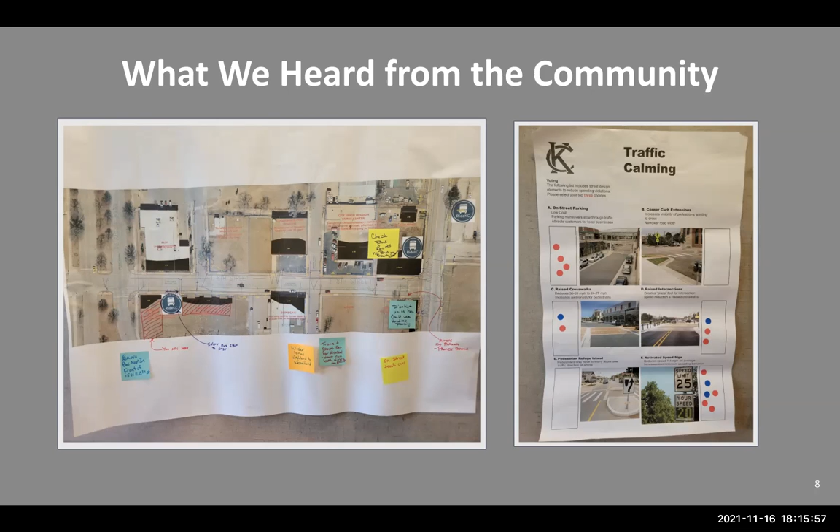So this is the start of our plans. The project starts on 8th Street at the Paseo. We're adding curb to delineate on-street parking, and also using it to narrow up the crossings and crosswalk areas. So we're adding crosswalks and ADA ramps to make the area more walkable, as well as helping to calm the traffic that goes down 8th Street.

We're adding some green space and some trees, and we're still accommodating the bus stop currently on 8th Street. We've moved it a little further east to allow for parking right in front of Quinlan Place. Then at Flora, we've improved the crosswalks and accessible ramps to help folks get across 8th Street going to the Aldi's or up the street, where there are some restaurants along Independence Avenue.

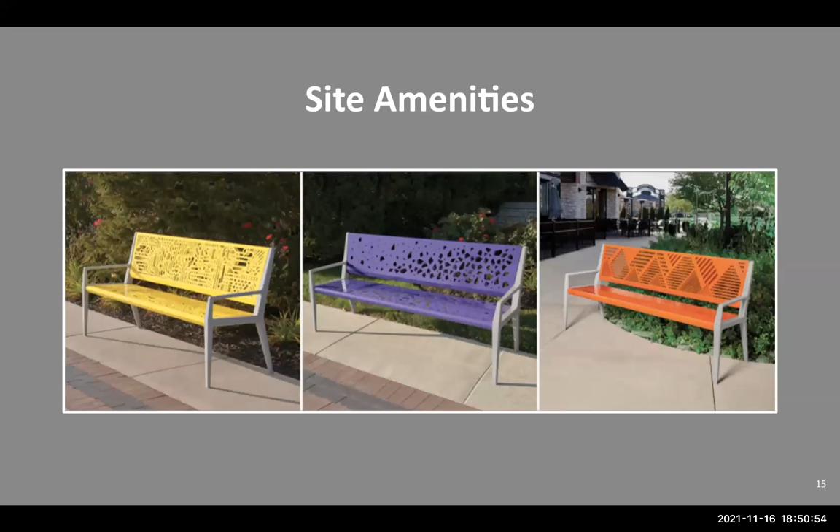It's fairly small scale, the plan anyway, but we don't have the specific locations identified. We just know that we want to integrate the seating into the streetscape, so the exact quantity is unknown, but we want to make sure we have plenty of seating opportunities. Michelle, anything to add? I would just add, I think there definitely would be benches at the bus stops. I don't believe there currently are any now, except for maybe the one down at 8th and the Paseo. But I agree with Bruce.

In our first round of the preliminary design, we kind of identified some seating areas. And then as we continued to work on the preliminary design, we decided to hold that out. You can see in the slide that's up right now, we have identified the bench at the bus stop there on Woodland at 8th Street. But we want to work with the community to really set those benches where they would be most beneficial to those living in the community.

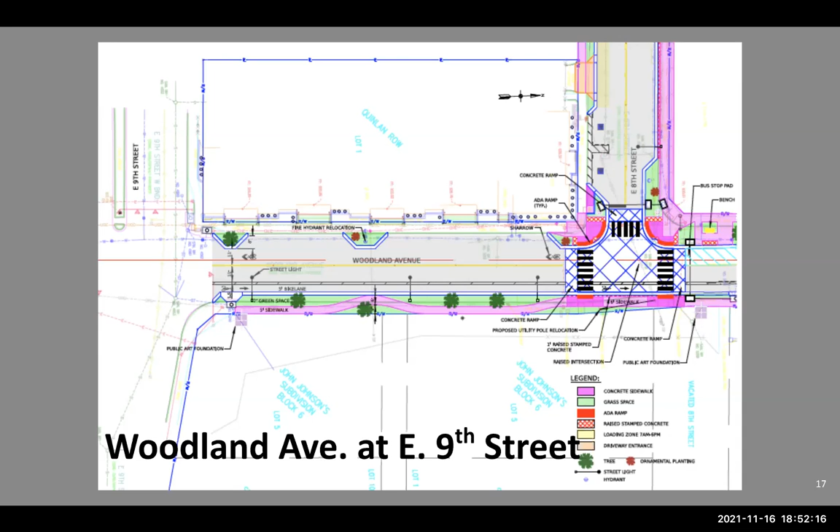So I have a comment on the benches, and then Chase, I have a question for you if you don't mind. My comment is, knowing our homeless population is in that area, how are they going to affect these benches you're talking about putting out? And for Chase, remember when Chris was still working with us, or working with Mattie Rhodes, we had some meetings dealing with some actual artwork, and one of the corners was 8th and Paseo, and some other areas. Is any of that artwork going to be tied into this area, or where did we end up with the placement of that endeavor we went through?

So that's kind of part of the placemaking that we've been working on. Mario and I, along with Evie Craig with Arts Asylum, applied for another NEA Our Town grant. We should hear back in the spring. That'll add some additional funds to leverage the funding we have for this project to incorporate that artwork, whether it's a sculpture or all of the above, is kind of where it's at. So we're planning to look for other sources of funds and engage the community for that artwork. But there are opportunities to place additional placemaking elements within the streetscape as it's set right now.

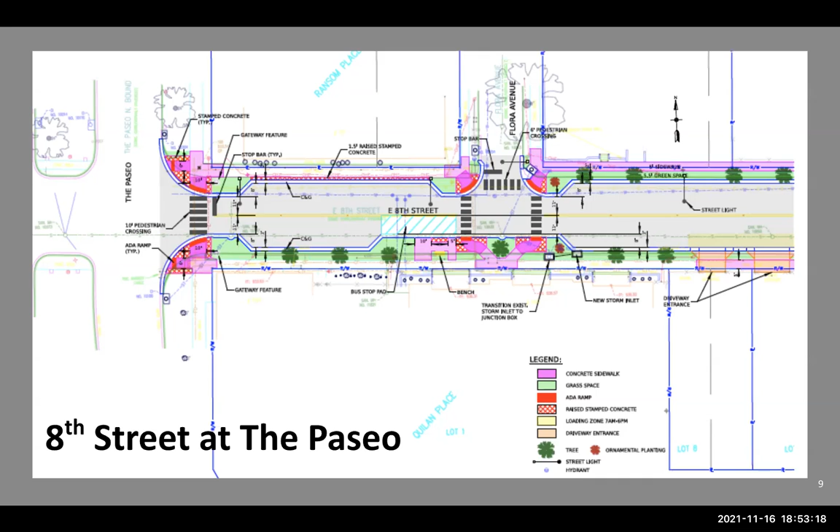Aaron, if you would go to the intersection of 8th and Woodland, we can point out a couple of places where we've identified possible art locations. You'll see there's a purple square, and we have labeled it Public Art Foundation. It's over on the right-hand side, just above where the intersection is.

So we've identified a couple of places within the plan to accommodate that art, as well as identifying the 4 locations for columns for neighborhood identity.

I think we are—I mean, the NEA grant is a little bit behind the schedule that we'd want to be, but we're trying to make, from a physical standpoint and also from a budgetary standpoint, some allowances that can allow us to add public art into this project as that art crystallizes. Once we know exactly what that is, we'll be able to incorporate it. But for the time being, we're trying to identify locations that might make sense. From a budgetary standpoint, we had maybe set aside some money that would help us implement whatever the public art ends up being.

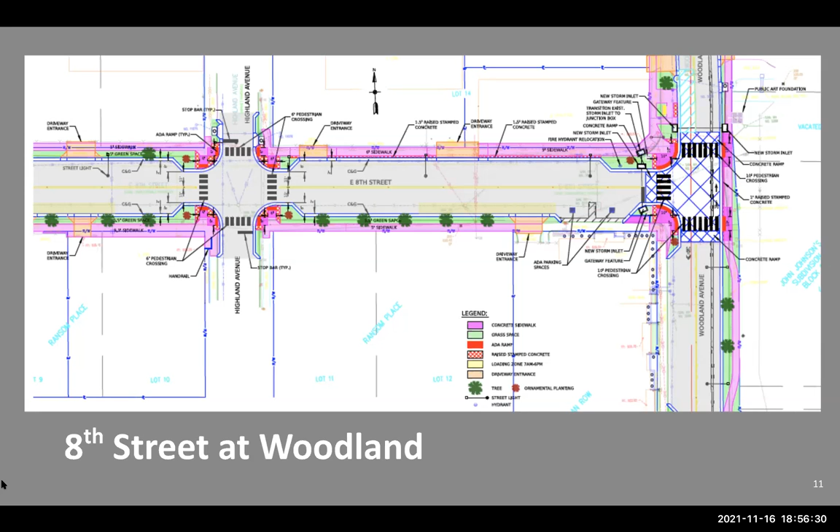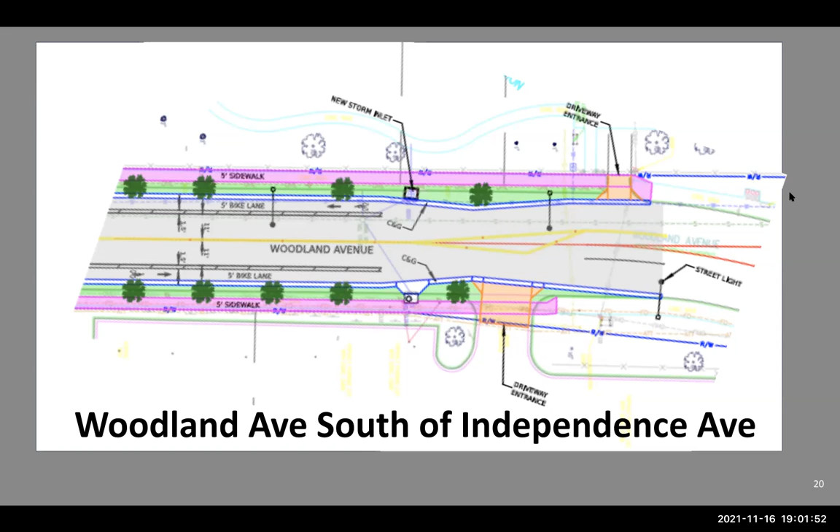Yeah, and I'm glad you brought up resurfacing, Michelle, because residents probably know Woodland was resurfaced just recently south of 9th Street. The intent was for it to be resurfaced all the way to Independence, but we put a stop to that because we knew we'd be coming back into this area and tearing it out again. That was one of our coordination efforts to make sure we're not wasting resources. But at the conclusion of this project, the roadway will be completely resurfaced and all the striping will be applied so it looks fresh and new, and we have a complete project.

I know this isn't the reason for this comment, but I'll make it regarding these bike lanes since you brought it up. From what you're telling us, it will be visually better to see what's going on. The bike lanes on 35th Street and Armour, my specific complaint is the one right west of Main. When you come out of the bank, you cannot see. It is hard to tell if cars are coming to even get out there. So just to put that tidbit in somebody's ear to make sure you're looking at visibility and safety in driving.

And I know our emphasis had been on the safety of the bike riders, but we all have to coexist. All I can see is accidents waiting to happen when your visibility isn't clear because of the way we've laid out the format of the street. Thank y'all for listening.

No, that was a great comment for us. We'll take a look at that location, because the project on Armour Boulevard was one of our very first ones, and that's one we learned a lot from. It's one we're continuously working to address. It's a little bit like getting into a new suit or a new dress, you want to make sure it's the right fit, and you have to tuck here, nip there, just to make it fit right. So we'll take a look at that. Thank you.

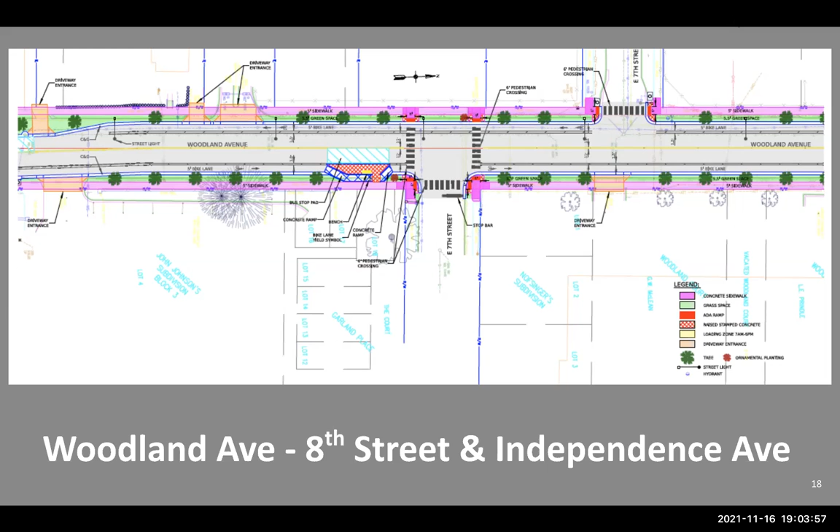Okay, we have a question about whether there is a timeline in consideration. From a schedule standpoint, our intent is to finish this design by January this year. And then proceed to advertise the project for bid during the winter, so we can get contractors lined up and begin work in March, April of 2022.

From a construction standpoint, I see this being about a 3 to 4 month construction, mainly because we've got 2 corridors. We have to maintain traffic in both directions, and at least in one direction. One thing we just thought about today is that Independence Avenue, the intersection at the Paseo Gateway, is going to begin construction also next year. So we need to do a little bit of coordination with that project to make sure our construction schedule and their construction schedule aren't creating a headache for the residents of the area. But everything else is working out great.